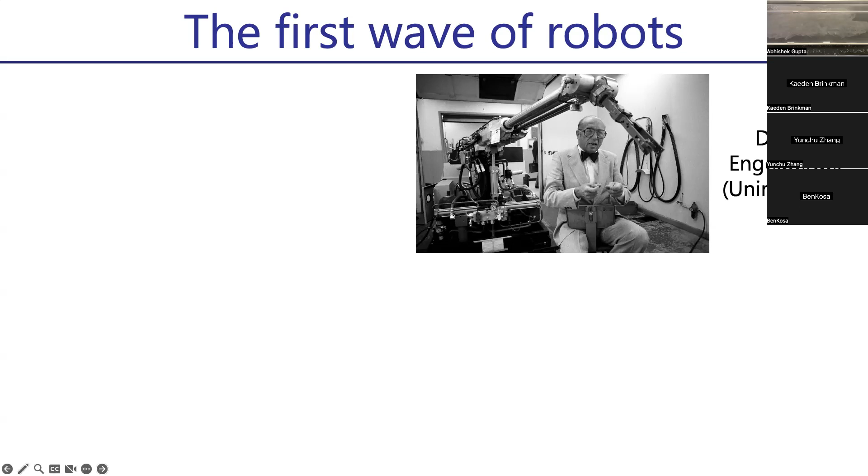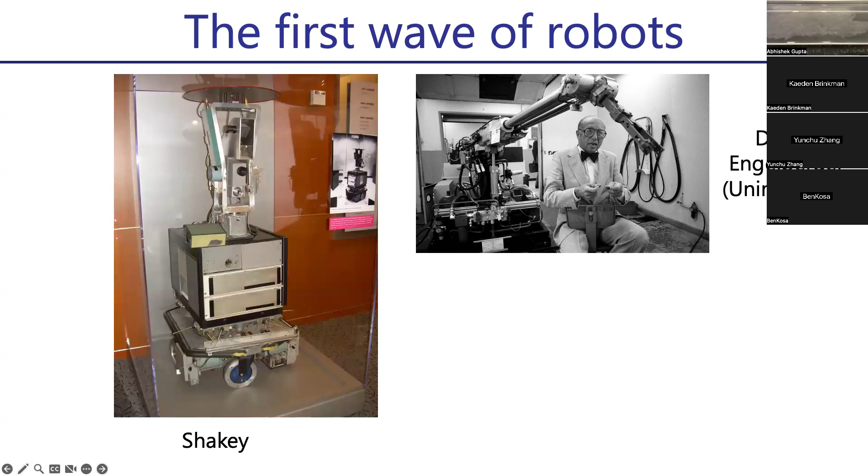And so, the first set of robots that we had, this was something called the Unimate from the 1960s. It was one of the first industrial robots by Devol and Engelberger, and they were putting it in GM plants and Honda plants and a bunch of car factories. And from there was a robot called Shakey, which was at Stanford, which was supposed to navigate around the hallways, getting to particular places, around unknown room configurations, dealing with uncertainty. And it doesn't look like a lot, but that robot led to the development of a lot of the algorithms that we're going to study this quarter. So that's also from the 60s. So maybe we should update our curriculum.

After that was the Honda P series in the 90s from Honda. And so if you all have seen the Asimo and those kinds of robots, these were the predecessors for the Asimo. And that's kind of what's led to modern robots today. And so that's a little bit of history. You should look it up. All of these are super cool robots.

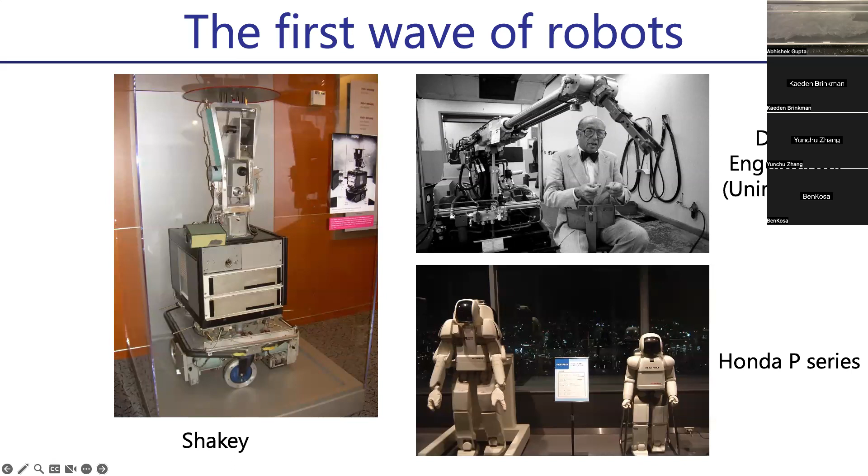But then the second round of robots that came about was from the DARPA Grand Challenge. So DARPA funded a challenge where they asked a bunch of teams to drive autonomously through the desert at high speed.

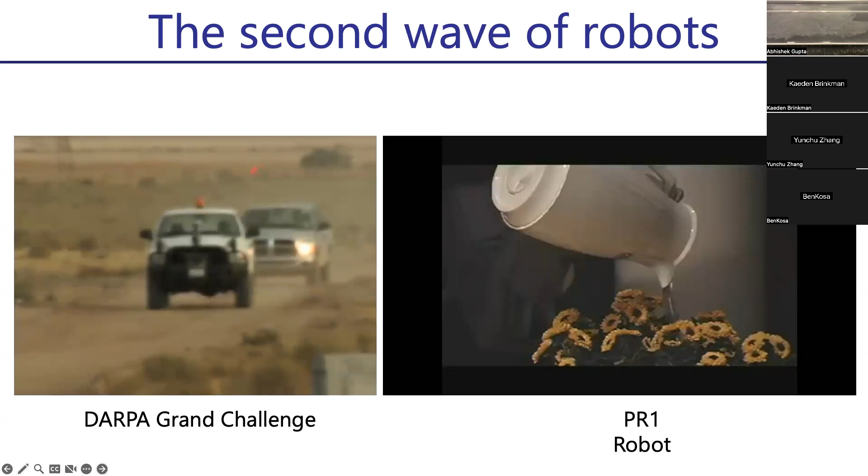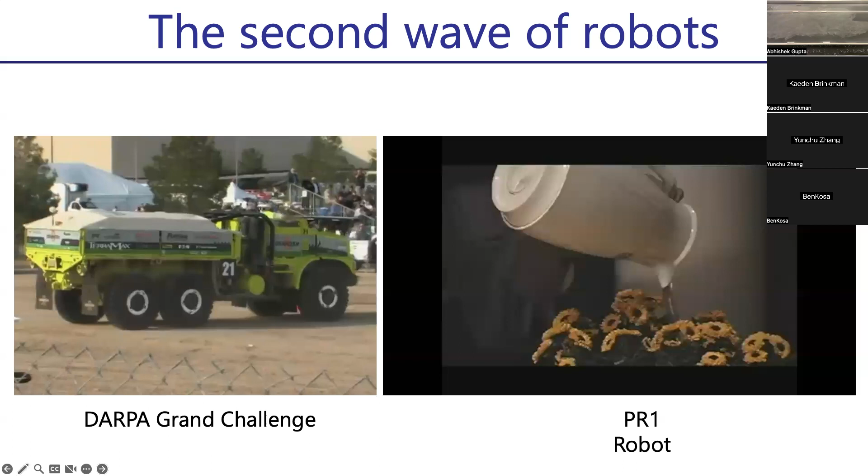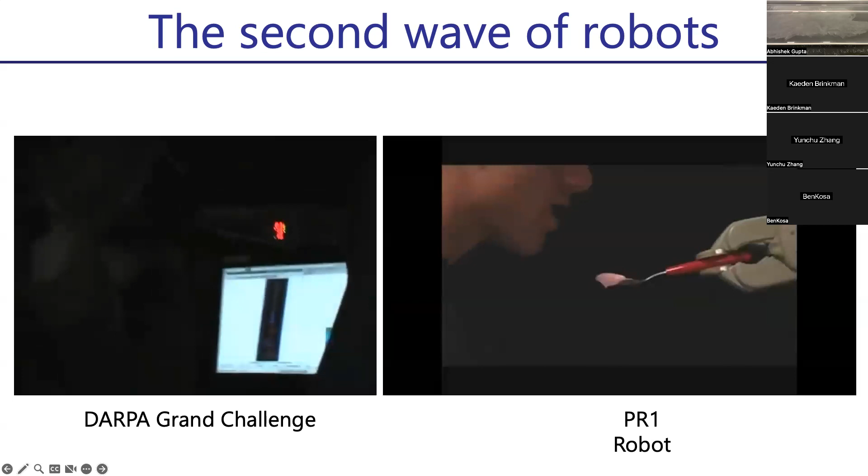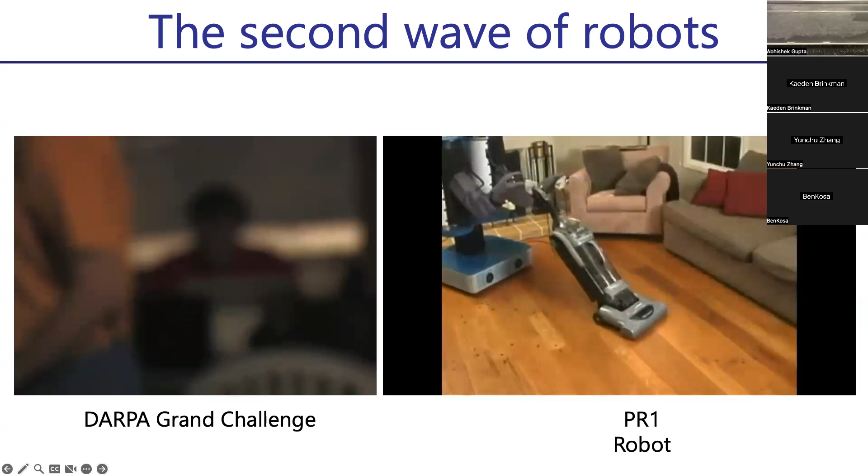Welcome to the DARPA Grand Challenge. The objective: create a self-navigating autonomous vehicle that can safely drive 132 miles through a harsh desert environment without human intervention. Yes, these are robot cars, and if you've ever wanted to see the future, take a good look, because it's right in front of you. The technology we see here will be used in the military within the next few years, and eventually, robots like these may be taking you to and from work. But it's not easy. 43 teams from around the country began with dreams of building a robot capable of conquering this course. Only 23 teams earned the right to run in the $2 million DARPA Grand Challenge final. For qualifying teams, information about the event is held in tight secrecy until race day. It is only then that they will receive details about the course. At 4 a.m., just 2 hours before their scheduled run times, competitors are informed that the route will stretch 132 miles over rugged desert terrain. With that information now in hand, teams rush to program their vehicles to navigate the thousands of GPS waypoints they will need to pass to successfully complete this challenge.

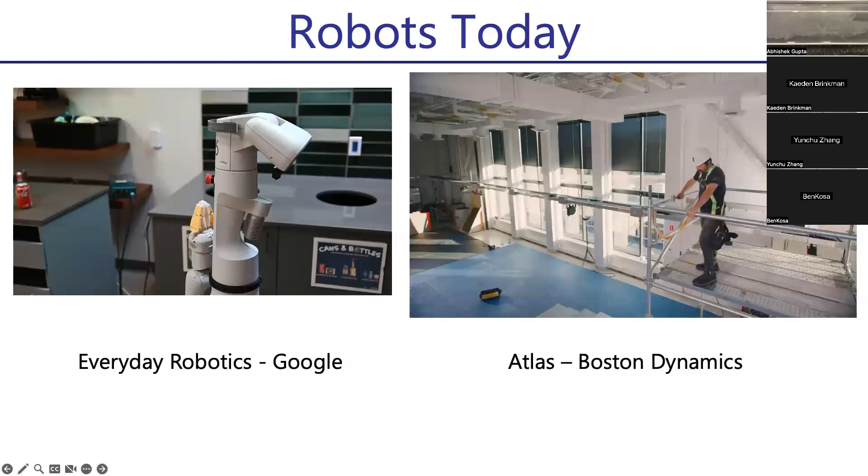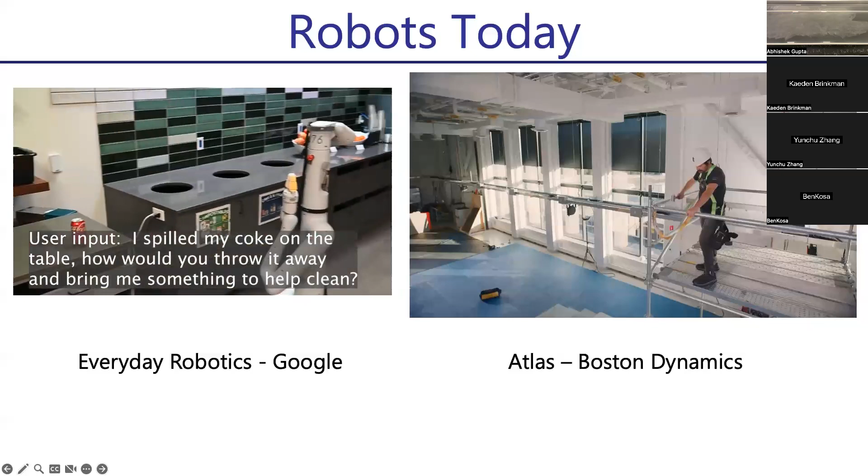So those robots are closer to the early 2000s. And now the robots today are much cooler. So these are the Everyday Robots from Google, where they're driving around these micro kitchens, trying to pick up objects, put them in places, retrieve particular food items, and so on. And they do it from language, and they do it in pretty general settings around people.

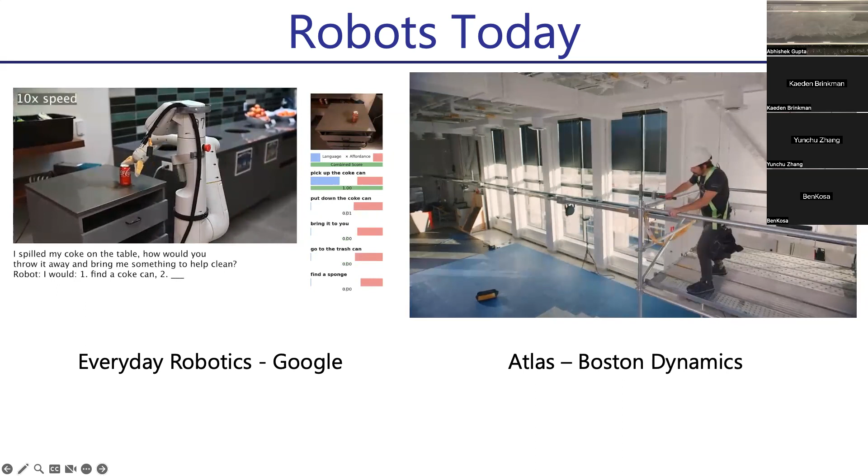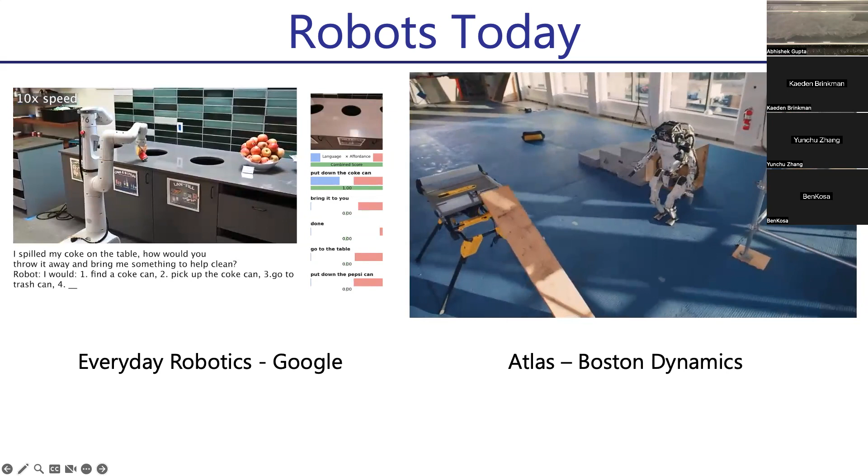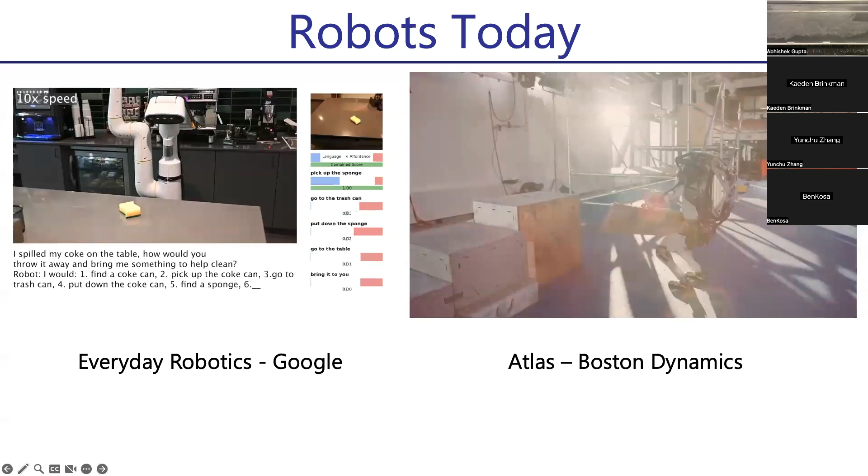And I showed all of you these from Boston Dynamics, where they have these Atlas robots that dance and jump and manipulate and do lots of stuff that looks amazing. The key thing to note here is that a lot of these are extremely cherry-picked, and they're controlled environments, and they do great with the problems, but they're not quite there. But it's still amazing. But it's important.

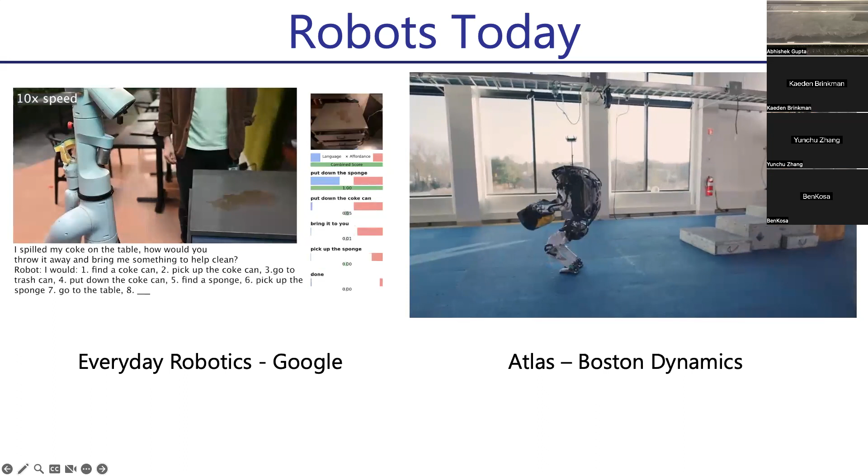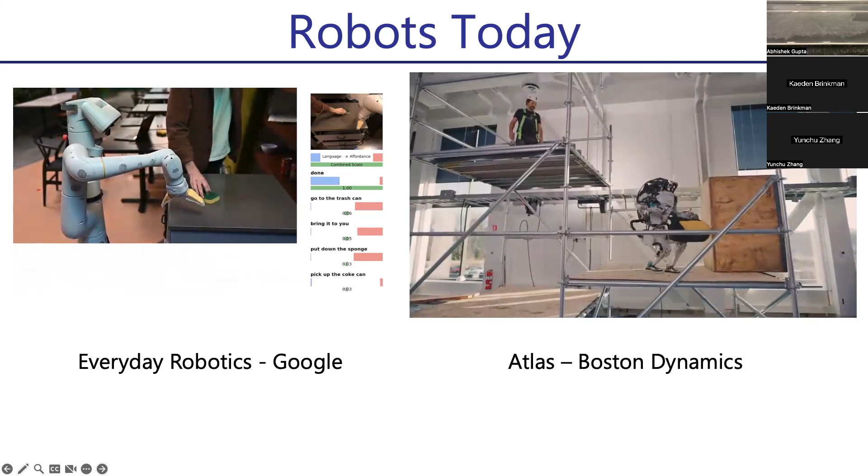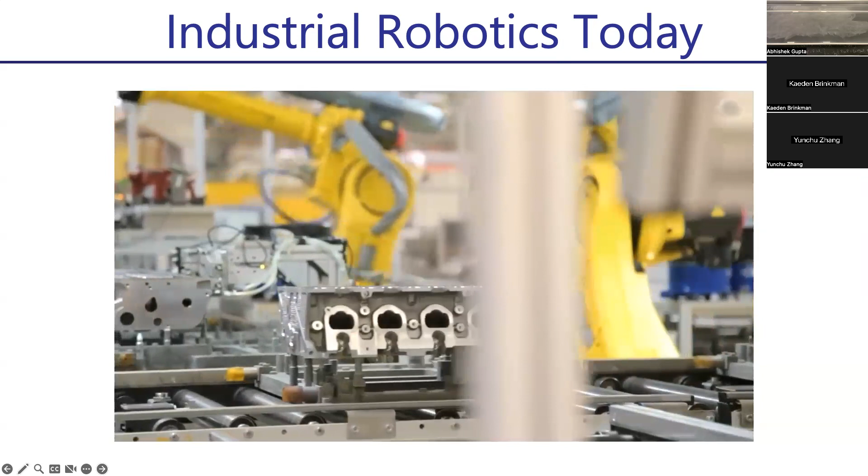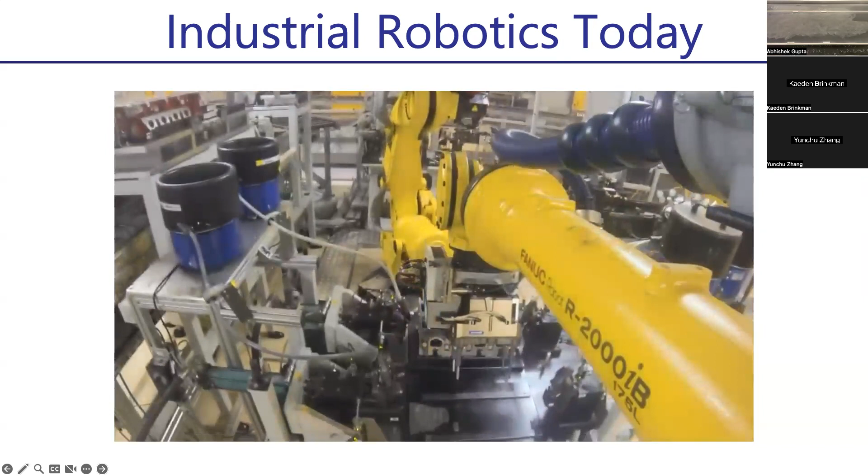Right. So some robots in industry which I think are cool to look at are these Fanuc robots in a car plant, where they're assembling car parts and doing precise motion at scale on millions of pieces, right? These are pretty commonplace in most car factories, but they're harder to do for small parts and things like that. The caveat here is that the factories are extremely controlled, right? If you have people messing things up, it doesn't really work. So it's extremely controlled, but it's still amazing.

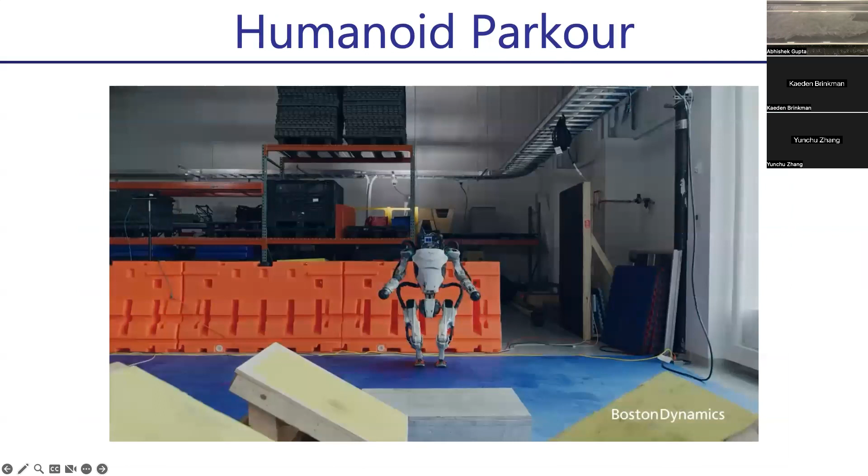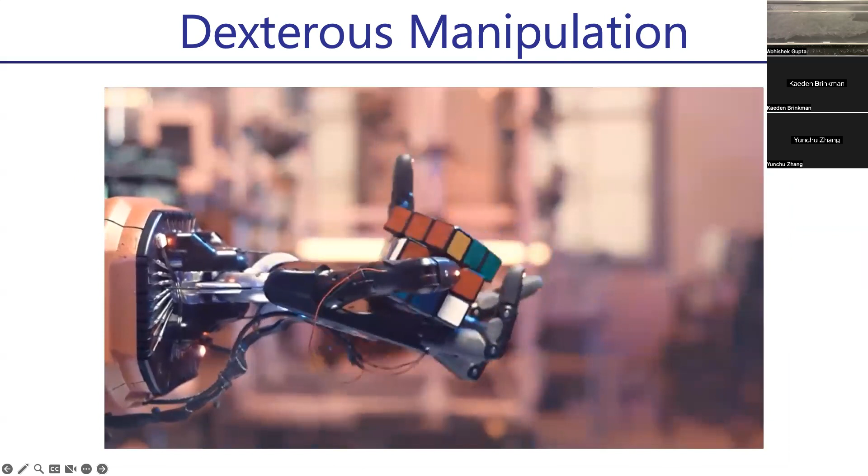And then we looked at the Boston Dynamics one, and this is another video I really like from OpenAI. We're trying to build robots that learn a little bit like humans do, by trial and error. What we've done is train an algorithm to solve the Rubik's Cube one-handed with a robotic hand, which is actually pretty hard even for a human.

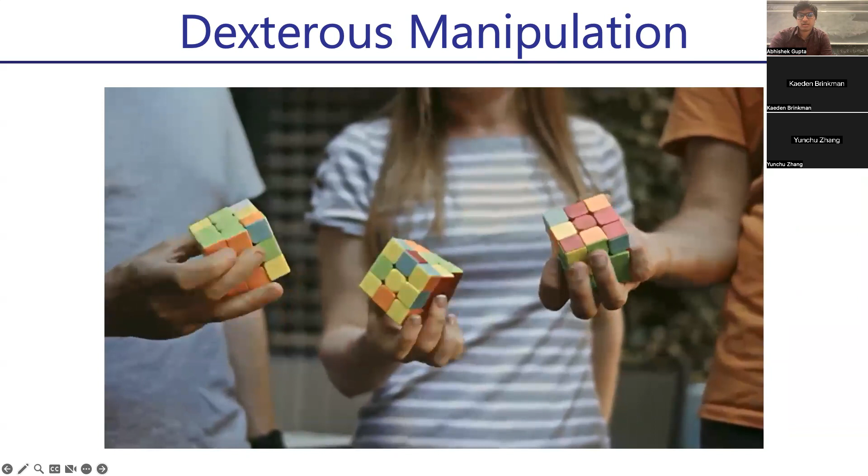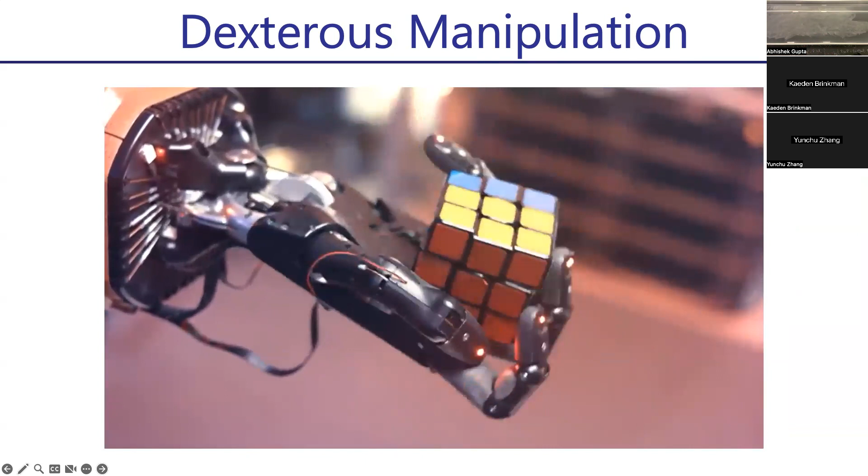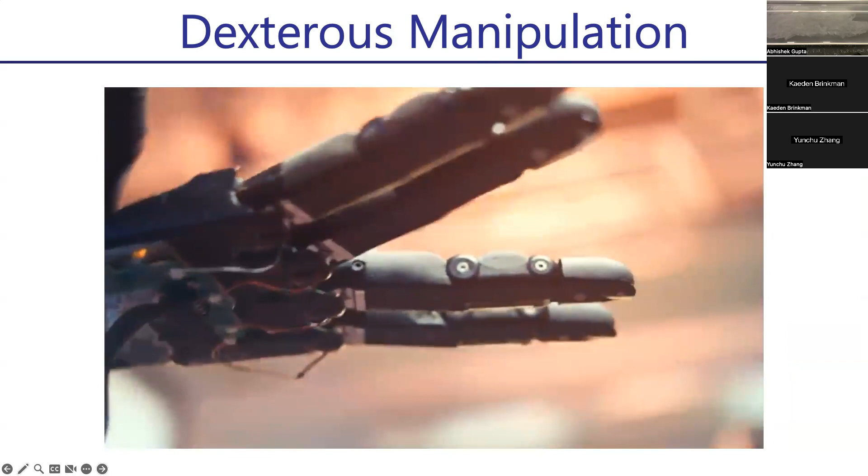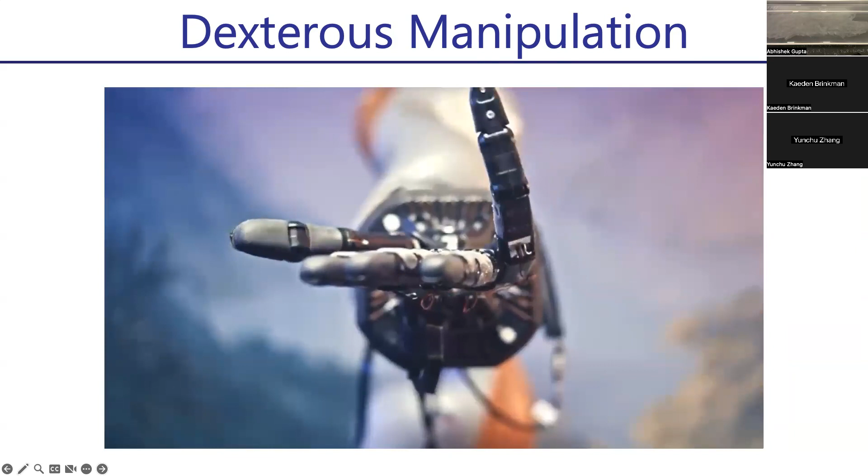Yes. Good. So the goal here is to manipulate this Rubik's Cube, solve it using a robot hand, and they actually trained this with reinforcement learning in simulation, and then transferred it to the real world. It was moderately successful, but it showed a bunch of things that we didn't think we could do before, right? What makes dexterous manipulation hard is that you have to make and break contact in different ways that are difficult to do in a hard-coded fashion. Because every cube is different, the friction is different, the contacts are different, it's hard to model, and so that's what makes these results pretty cool.

All right, so I think that's most of the results I want to cover. And now you're thinking, okay, I want to make these robots. It's a big mush, I don't really know how to even approach it. So what we're going to try and do today is think about a framework we can use to think about how to build robotic systems, right? We've looked at a bunch of interesting, useful robotic systems. Today we'll think about what the design methodology is going to be for building new robotic systems.

So we're going to think through the steps we would take to go from tabula rasa, where we don't have anything, to the design of the robotic system. And then we're going to spend the next 10 weeks actually implementing said robotic system. But let's lay out the structure of what the pieces are for a robotic system, why those are the pieces, and think through the design of a general purpose system.

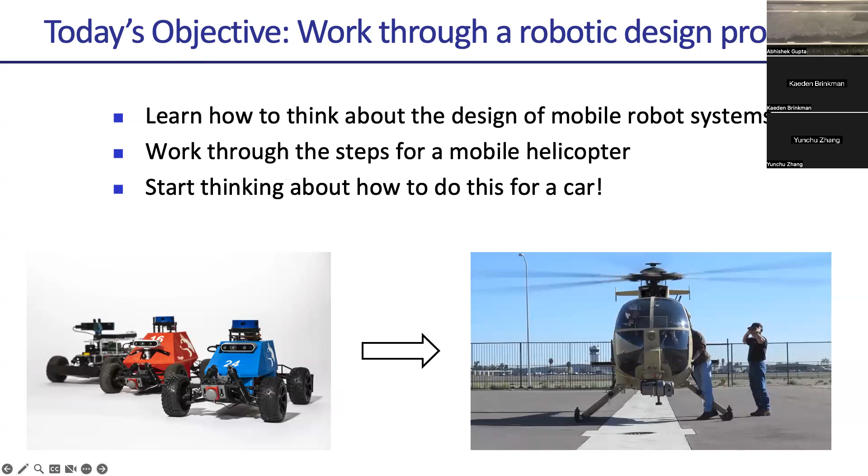So we're going to do race cars, but to motivate what we want to do, let's think about helicopters instead, right? It's a similar type of system. The next 10 weeks are going to be devoted to race cars, but today let's think about helicopters. So what we want to do is autonomously navigate with a helicopter.

So we have this autonomous helicopter equipped with a bunch of different sensors: a LiDAR, GPS, camera, a bunch of other sensors. You have autonomous control over the different pedals of the helicopter, and you want to accomplish a mission, right? You want to take off somewhere and land somewhere else, deliver a payload, do it safely under uncertain conditions, without having a human operator.

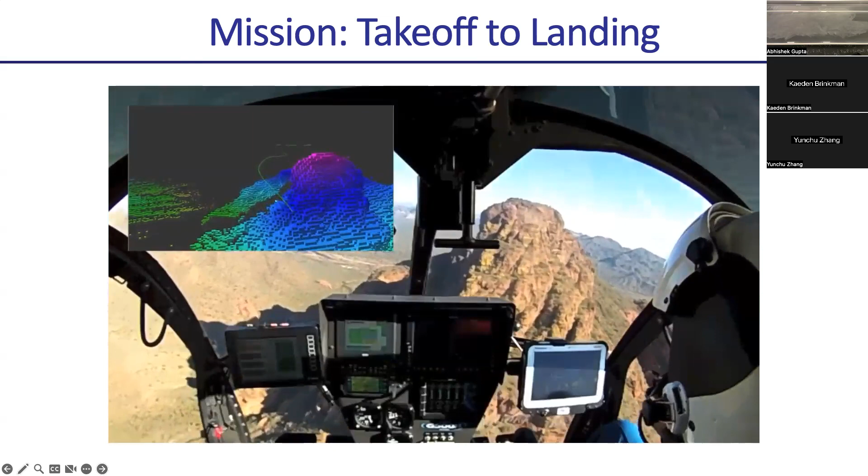And so all you really want to do is upload a flight plan of where you want to go. You don't know exactly what the obstacles are going to be. The world keeps changing, the weather keeps changing, the terrain often changes, right? And so you want to figure out how to navigate around these obstacles, not crash into rocks, and get to where you want to go, even under uncertainty, under different weather conditions, under different wind, and so on. Right?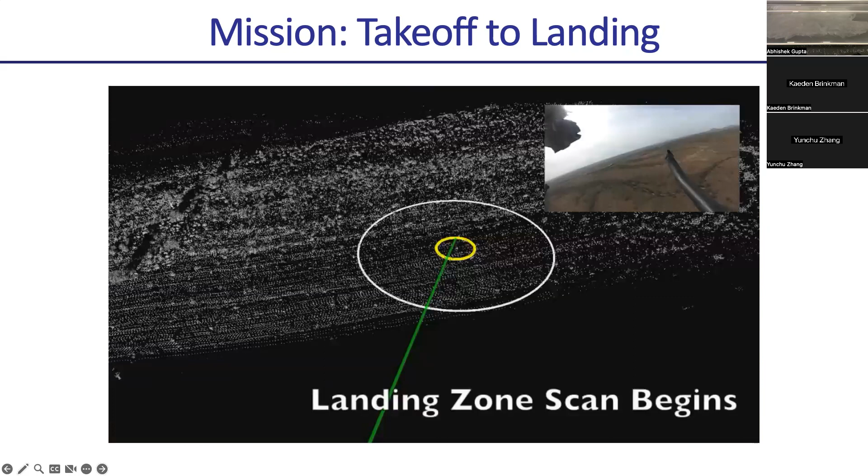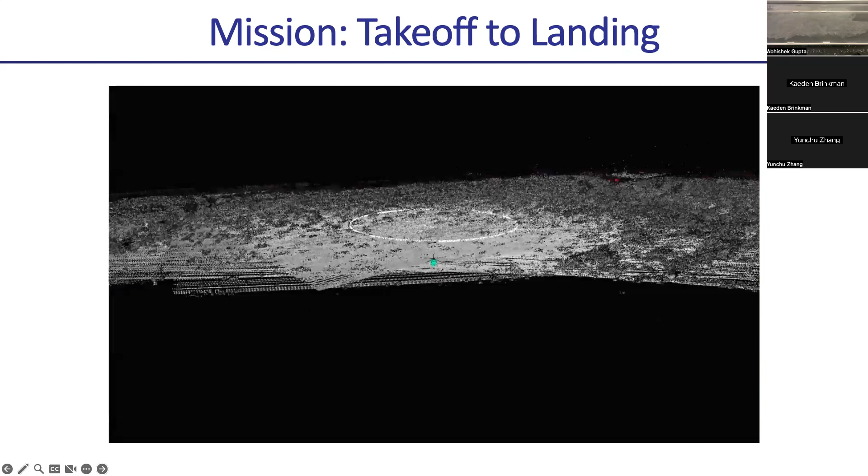And this is like a several million dollar helicopter. You really don't want to crash it. Right? And so that's the kind of problem we're going to think about, which is how do we take an autonomous helicopter and then figure out how to control it to go from point A to point B under certain conditions. Right? Does that problem make sense? Yeah. All right.

So generally, you're going to start somewhere. You have takeoff. You're going to have a bunch of obstacles on the way, which we're not going to know exactly. Right? You're not going to know exactly what the obstacles are a priori. They're not going to be on a map of the US. And then you know where you want to go, but you don't know exactly what the conditions are going to be when you get there, right? So you might want to land here, but there's an obstacle, so you might want to land nearby.

So you want to start somewhere, get to the target while respecting constraints of fuel, power, not hitting anything, obeying flight rules, right? And so you want to successfully accomplish this mission autonomously, right? It's not that different from a race car, it's just one flies and the other doesn't.

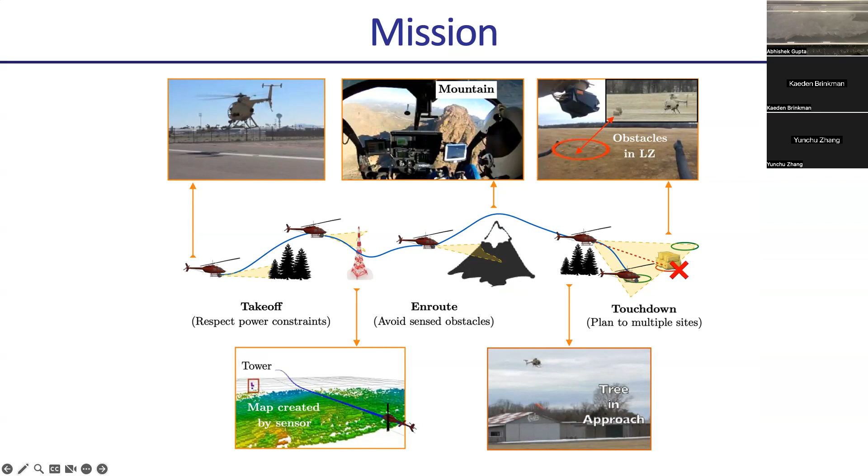Okay, so to state our problem more clearly, we are given a starting latitude and longitude, goal latitude and longitude, a list of no-fly zones, so things that we can't go into, right? A terrain map roughly of the US, but that is not necessarily accurate. And then we're given access to some number of sensors on the robot, each of which is somewhat noisy.

Right? What we really want to do is figure out how to get from point A to point B while minimizing time, not crashing, not running out of fuel, not violating any federal laws. Right? And you want to make sure that you do it in a way that doesn't make anyone feel unsafe and doesn't cause disruptions to other vehicles and all of those things. Right? So that's the problem statement we're going to think about.

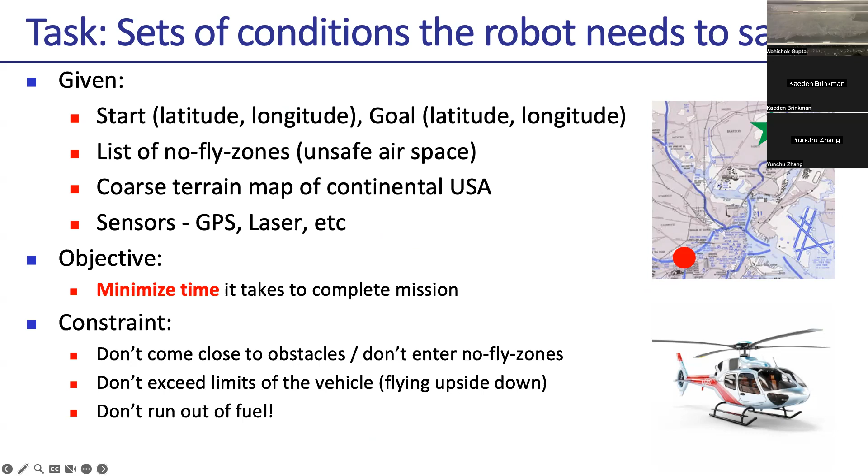And let's think about how to tackle it, right? So the first thing we're going to think about is how to tackle it the model-based way, right? And then we'll cover the model-free way. So when I say model-based, what do I mean, right? So let's start by thinking about the problem from first principles, right? So it's going to start from what are the inputs and outputs of the system, and then you're going to walk me through how to do it.

So you have a helicopter, you have some number of sensors, you have a laser, right, which tells you how far away things are. You have a camera, you have a GPS that approximately tells you where you are. And you want to do some black magic, and you want to output some set of actuators, which is like the lever and the pedals and the stick, which control your helicopter. And now I want to figure out how to, given the constraints of my system, start from those sensors and output these actions. Okay. So that's the inputs and outputs. How would you approach it?

Yeah. Well, I guess the basics, like front end, right? You get the desired state vector and the actual helicopter state, right? Yep. Use some kind of controller, like a PD controller, to actually move the actuators to get toward that desired state vector.

Right. So, remind me of your name. Okay. Gavin? Gavin. Okay. Gavin is saying we want to use something like a PD controller. We haven't really covered PD controllers yet, but let's assume it's a controller that says you want to go from point A to point B, and it helps you figure out how to get from point A to point B while compensating for errors.

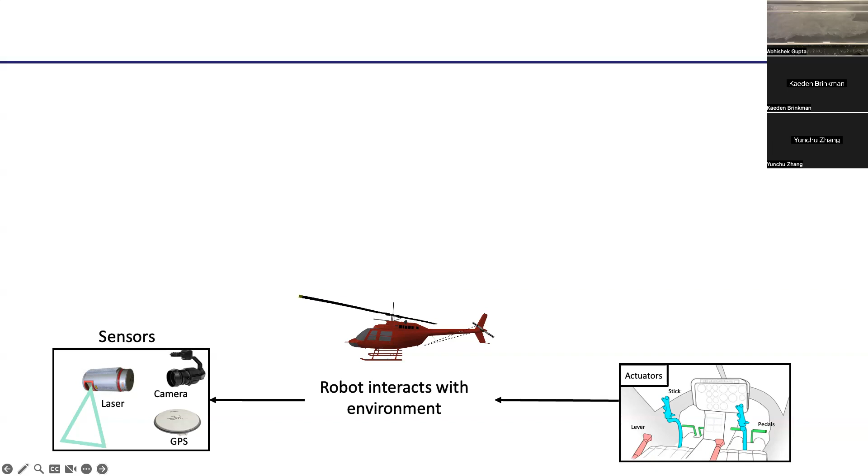My thoughts? Yeah, for the first step, is having a general state estimator based on their inputs. Right. So, let's figure out where state estimates fit into the whole thing. Right? So let's start by defining what I'd call a world model.

So we want to start by using our knowledge about the system, right? So we know this is a helicopter. We know how helicopters work. We've studied physics, right? And so we want to be able to use our prior knowledge of the system. We know the rules of aerospace. We know we can't navigate into certain regions. We know that if you collide with things, they're bad, right? And so we have a lot of prior knowledge about our system.

And so we're going to try and use that prior knowledge about our system to design this control, right? So we're going to take all of our knowledge about the system and encode it into something we call the world model, right? Or a model. And this model is basically figuring out how the world works. It encodes all of our knowledge about the rules of the world, right?

So if my helicopter was here and I applied some controls, where would it be? Or I can't go into this part of the world because I'll get a big negative cost. All of that is encoded into a world model. And so a world model is basically anything that encompasses all of our knowledge about the system. But a world model by itself doesn't necessarily connect to the actuators and sensors, right?

So you need to figure out how to take the sensors, make it appropriate to go to the world model, and then get the outputs of the world model and actuate the system. Okay? So what do I mean by that? We take our sensor readings, raw laser readings or raw camera readings or raw GPS, and we convert it into something that is compatible with our knowledge about physics, our knowledge about the world, right? And now we have a world model that tells us how the world changes when you take actions on it. And once you know how the world changes, you can decide how to act, right?

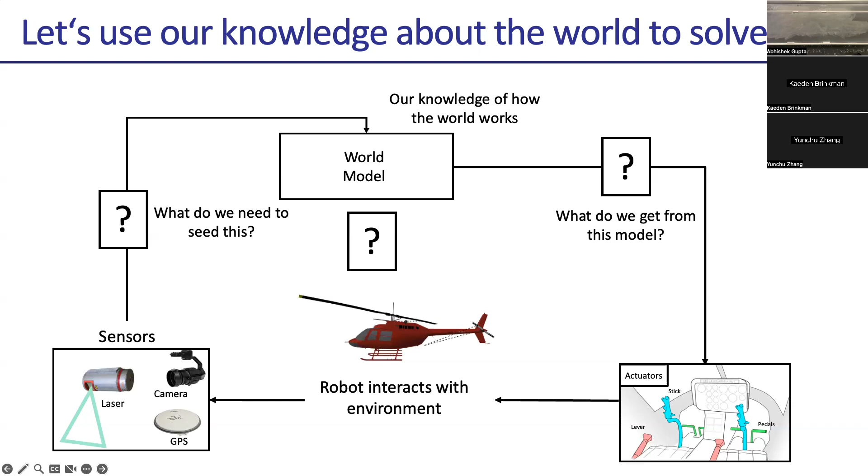Does that seem like a wildly incorrect model of the world? No? Okay.

So, as I said before, we're going to study these three problems of state estimation of where we are in the world. We're gonna figure out how to model our system. What is modeling? And then we're gonna figure out how to actually act in the world, how to plan and how to do control. I'm gonna define all of these terms, but intuitively, they mean: how do we decide where we are in the world, how does the world work, and then how do we act to accomplish the desired objectives?

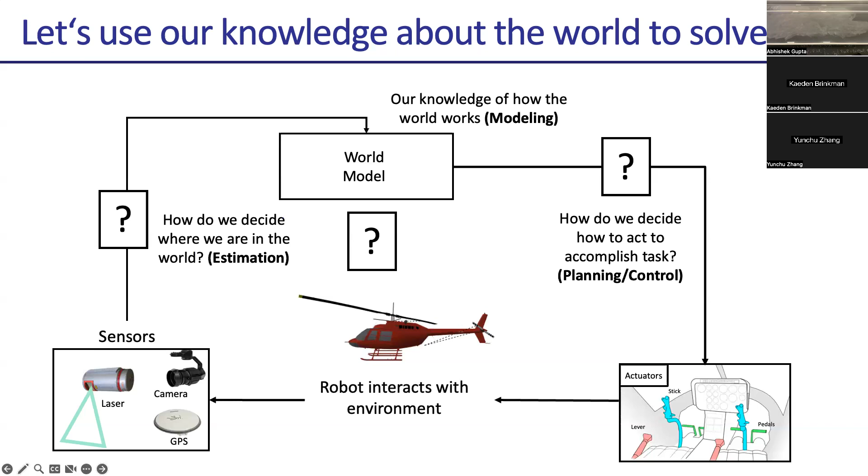Okay, great. So given this model of the world, or given this pipeline of robotic control, this is like the general template of design. Let's try and get more concrete, right? These terms are still very abstract. Let's try to make them more concrete. So let's think about modeling.

What does modeling mean? Essentially what I mean by modeling is that you want to figure out, given an estimate of where you were in the world, and some set of sensor readings and some set of controls, where are you going to be in the world next. A model is something that uses our knowledge of physics, our knowledge of the particular domain, etc., to take your previous state of your system, or your previous estimate of state of your system, and then figure out what your next estimate should be.

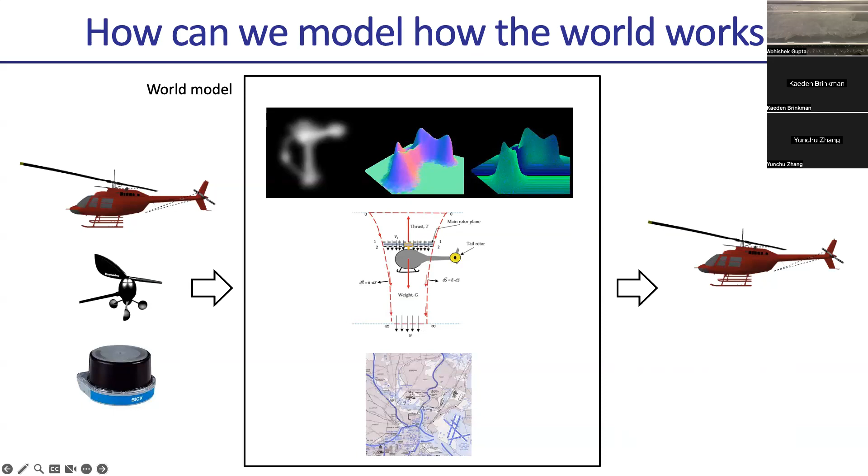So essentially what a model is going to do is figure out how the world works. What I mean by that is we have certain variables that you want to model, things like the position of your helicopter and the speed of your helicopter, what is the payload distribution like. You might also want to model things like what the wind conditions are today, or other things that are not necessarily known a priori and may be changing throughout your control sequence.

So those are the things that you want to model, and you're going to figure out how they change - the position, the speed, the payload distribution, the wind, the effect on other vehicles. The way we're going to use that is we're going to use our knowledge of physics, our knowledge of how aviation rules work, our knowledge of other aircraft. We're going to encode all of that into a model - a mathematical object that takes in previous estimates of state and what action you're going to take, and gives you the next estimate. To do that, we're going to use all of the fancy work that physicists have done for the last 200 years.

And then besides just figuring out how the world works, you also want to accomplish particular objectives - you want to get to a particular location, avoid obstacles, satisfy certain constraints. So let's say you had a vat of dangerous fluid on board and you didn't want to spill it - you'd incur a huge cost if the pitch of the helicopter changes. So all conditions and constraints on your mission are going to be encoded into something we're going to call a cost or an objective function.

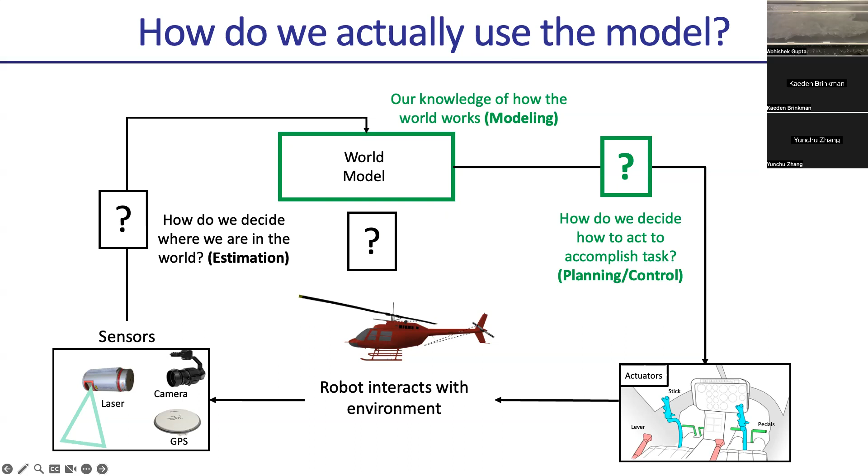What you need to figure out is how do you act in a way that minimizes your costs or satisfies your objectives while satisfying your constraints. That's what we're going to call planning and control. The planning and control is essentially how do we use our world model given an estimate of state to accomplish desired objectives.

Now there's two different words here: planning and control. They're very related, but they're slightly different. Planning is figuring out how to act in a coarse way, and control is figuring out how to act in a really fine-grained way.

When I say coarse way, I mean you want to figure out how to act at like the 10-meter resolution as your helicopter is flying through space, in a way that doesn't hit obstacles, doesn't go into no-fly zones, and satisfies constraints like not spilling dangerous liquid on board. So the problem of planning is: given a start configuration and an end configuration and constraints of your system, how do you figure out the sequence of configurations that take you from one place to the other without hitting any obstacles? Hitting obstacles is one instantiation, but there could be others.

So that's what we're going to refer to as planning. And control is going to say, okay, imagine planning gave you a bunch of configurations along the way, saying this is the next place you should go in 10 meters, and tells you what the next position and next velocity should be. Control takes that desired position and velocity and converts it into motor torques, or how much to press the pedal, or turn the rudder—the controls of your system.

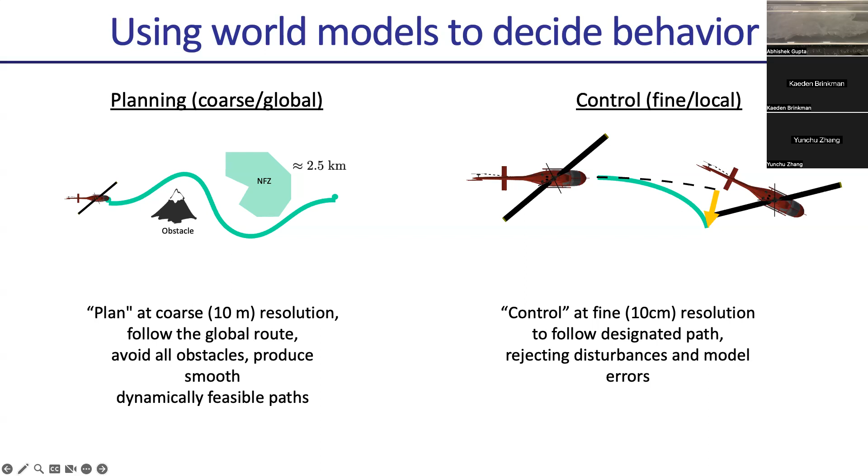So planning and control are not that different—they're just operating at different levels of resolution. The things you think about in planning are very global, and that's why planning methods are often very discrete, whereas the things you think about in control are much more local, which is why control uses much more continuous methods. But that dichotomy is a little false.

To recap, planning is an optimization problem where you want to search over a sequence of actions that minimize a particular cost function or optimize some constraints using our world model. The planner needs the world model because it tells you how the system can move, and you need to make sure you're not violating constraints—not hitting anything, not spilling liquid, and so on. So you're trying to figure out, say for a helicopter, how to get somewhere while satisfying constraints and obeying the world model.

So a question there is, why is this hard? This seems easy, right? It's like, here's my helicopter, I want to get here, just draw a straight line between us. Seems pretty simple, no? What makes planning hard?

Yeah. And when you're implementing the action, maybe due to physical physics parameters or different embodiments, the error might deviate a little bit. And then that compounds as you go through the entire cycle.

Okay, that's a great point. So the point is about compounding error—when you mismodel the system embodiment or the system physics. That's something you'll deal with much more in control, and control is going to do the stabilization.

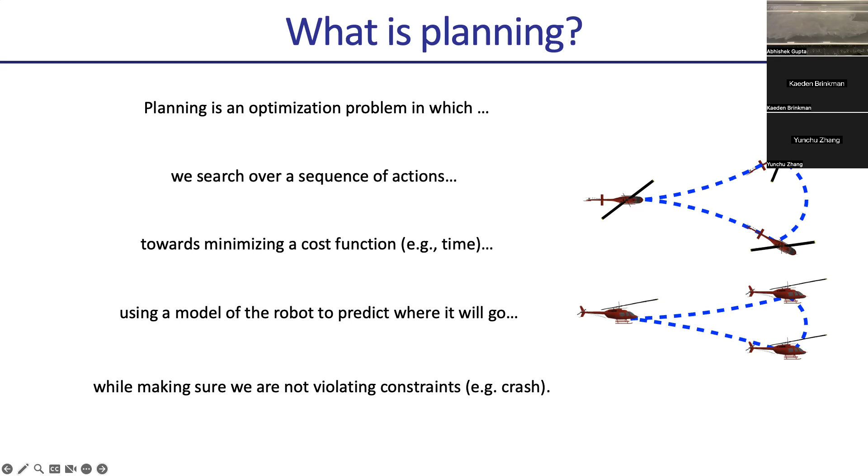The 2D image is a little misleading—think about it in like a 10-dimensional space, and everything becomes much messier. So that's what makes planning hard. Does that make sense? Everyone following that? We will have a planning homework, and you'll see exactly how hard it is. But for now, take my word for it being hard.

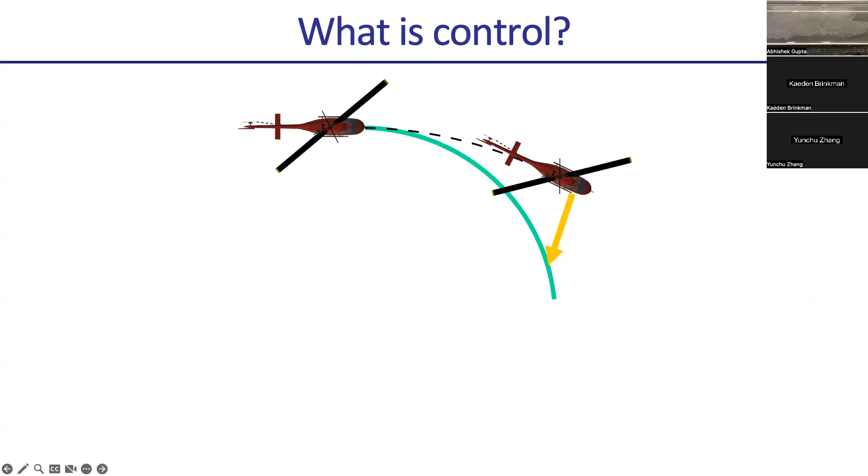And control is really about dealing with compounding error, dealing with misspecification, right? So we talked about how our models will be wrong. If our models are wrong, then our controls will be wrong. If our controls are wrong, then if you don't stabilize your system, you will fly off and hit a wall. And so what you have to do is feedback.

So you decided you're going to take some controls in the world. You acted, it didn't go according to plan, and you have to replan so that you can deal with that error, right? And if you ran the system without doing control, without doing feedback, you will have an accumulation of these mistakes. And the more you accumulate, the more likely you are to go off track. So you made a plan, you're trying to follow the plan, but the world is not the way you thought it would be. And so unless you do feedback control, you will never actually accomplish it, right?

Does that make sense? So what you would see with your race car, for instance, is that you can command it a series of motor torques, and you try to play them, and it will not do what you expected. Whereas if you do feedback control, every time you make an error, you recognize that you've made an error, and then you try to correct it. And so most of control is really about stabilizing your system. And stabilizing your system just means trying to follow the path that you want to follow. So that's the essence of feedback control.

And so we'll cover a few different things for feedback control. But planning and control together give you the behavior that you want. Control is often very local. I can't figure out how to navigate around the UW campus just with control. And planning is very global, but I can't actually execute it without control. And so they go hand in hand. You can't do one without the other. Great. So that's kind of what control is.

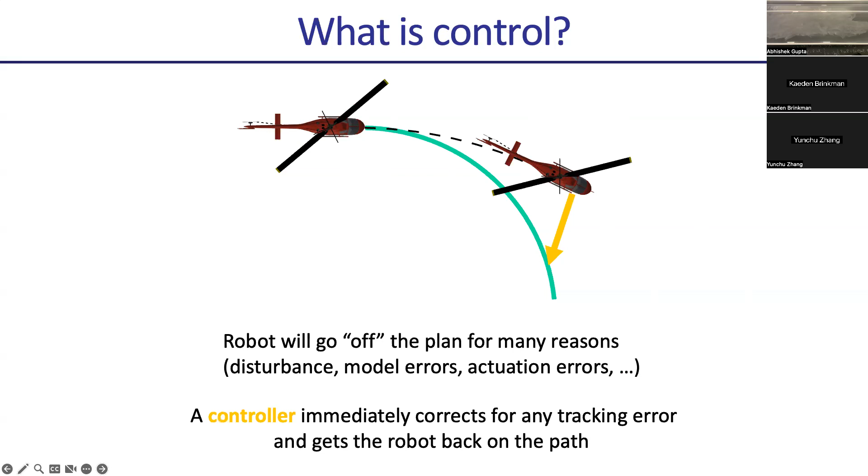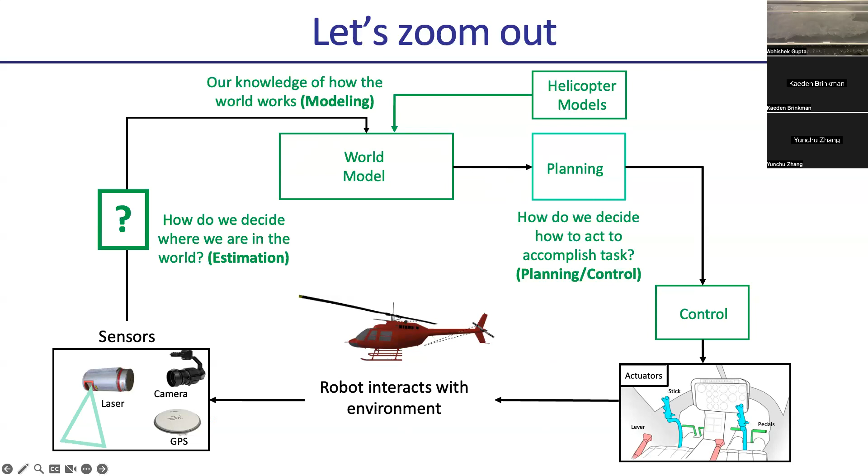And often that is wrapped up into control. But the line is a little bit blurry. But yeah, it's a good point. So how do we define and use actuators is important. How do we define and use sensors is important too. But the last piece that we really need is state estimation, right? So we've connected the dots from a world model to control, but we haven't connected it to sensors yet. So we've said, if I knew where everything was in the world, I would be good. So far we've tried to do control and planning, assuming that we knew everything about the world, and we figured out what commands to send to our actuators.

But we don't, sadly, alas. All we know is noisy readings about the world. We don't exactly know where we are. As I discussed last time, you have a race car in a building, you don't know where it is. And so you have to use your sensors to figure out where you are in the world, and not just where you are, but what are all the variables that you need to seed your world model. So for instance, you might want to know what the wind speed is to figure out what parameter to feed into your model, right?

And that's a prognostic estimation. You want to estimate what the wind speed is going to be, right? So it's not just position and orientation, it's anything that you need to seed your model, you have to estimate. You have to estimate it from sensors.

Okay, so the problem with state estimation is to say, you want to figure out what all these things are that your world model needs, right? So you want to figure out where is the robot, what is its position, what is its velocity, where are the obstacles in the world, what are the no-fly zones, where are the other aircraft, what is the wind speed, right? And you want to figure them out from these noisy sensors.

If you have used even a simple depth sensor in the real world, it's just full of noise. It's messy, right? So what makes this difficult is that there's noise in the system. So the first thing that makes this problem challenging is that you have a large amount of information, right? So let's consider this particular mission.

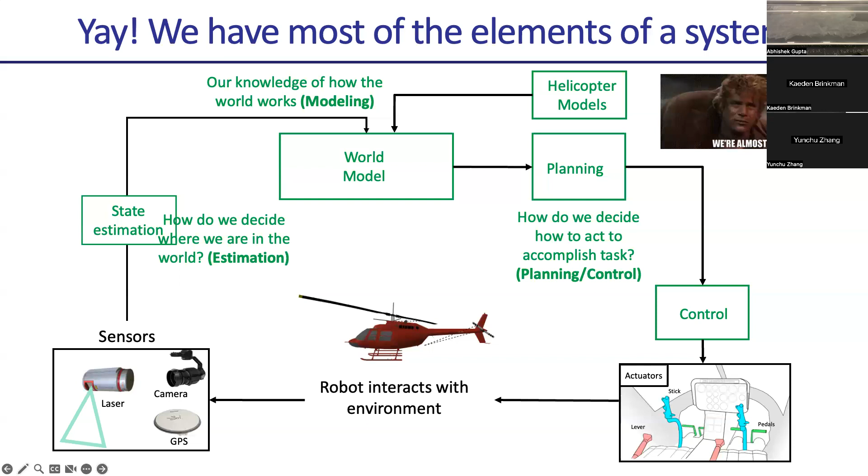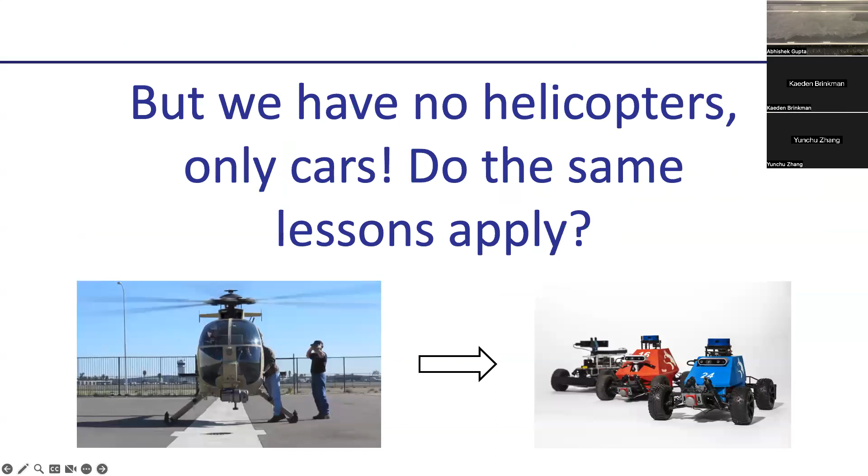So we'll go from here to race cars. The goal is to do race cars, not helicopters, since we don't have any helicopters. If we succeed or not, only time will tell. We have 10 more weeks for you guys to figure out how to control these race cars.

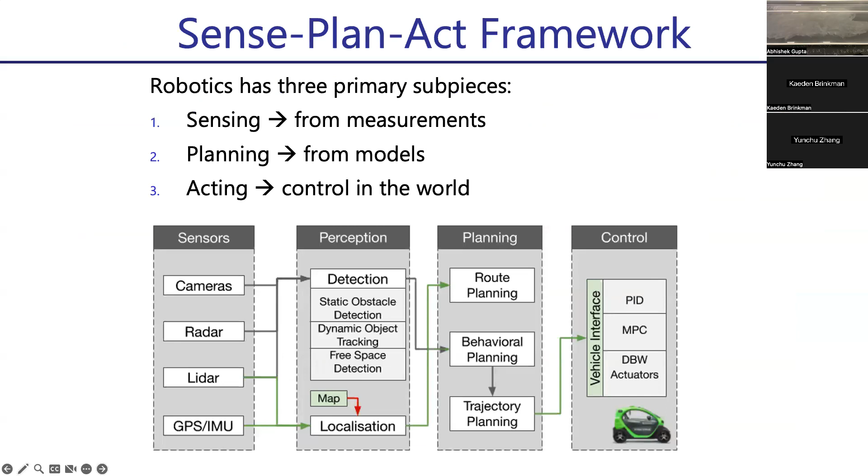But before we end, in the last 5 minutes, I wanted to discuss a different way of doing control. We've talked about the model-based way. It's model-based because we took our knowledge about the world and stuck it into our system, right in the middle of it. But in what cases might this be hard?

Yeah. When the states are not so low dimensional, yeah. Right. And also not fully observable. Not fully observable, and not low dimensional. Good points. What other situations might make this hard? Yeah. The world might change a lot. Exactly. Another way of putting that is when the world is extremely diverse.

If you have to deal with a different object every day, who's gonna model it, you know? So in lots of cases, the model might be extremely hard to specify, or it might be so uncertain that it becomes unusable.

And connecting with perception is easy in some cases, like a helicopter, but let's say you're deployed in a household kitchen environment, it's not really clear where everything is, and it's not clear how perception connects to everything. And so in those cases, it might be useful to be model free, right?

And so what I mean by model free is that, okay, we discussed this pipeline of state estimation and modeling and planning and control, and we're gonna throw it all away. We're just gonna do end-to-end control, right? And what I mean by that is we're gonna figure out a machine learning model that takes in your inputs, which are your sensor readings, and it's gonna output your controls, right?